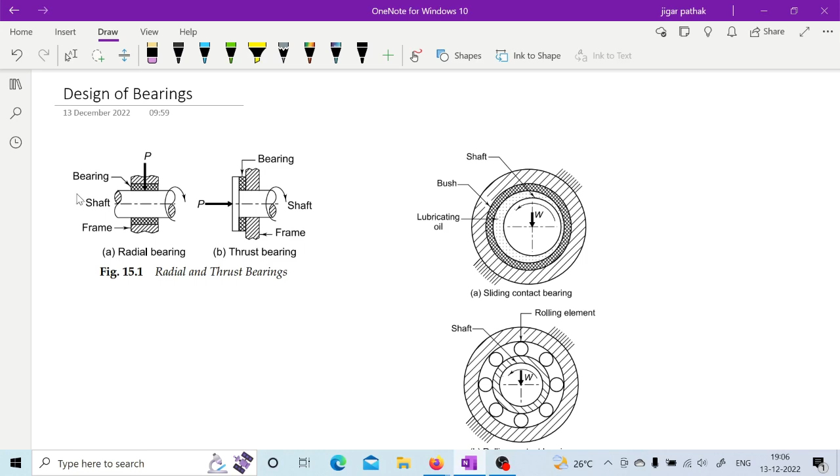If we discuss the main functions of bearing, then we can list those functions. First, the bearing ensures free rotation with minimum friction. Then it also supports and holds the shaft in correct position.

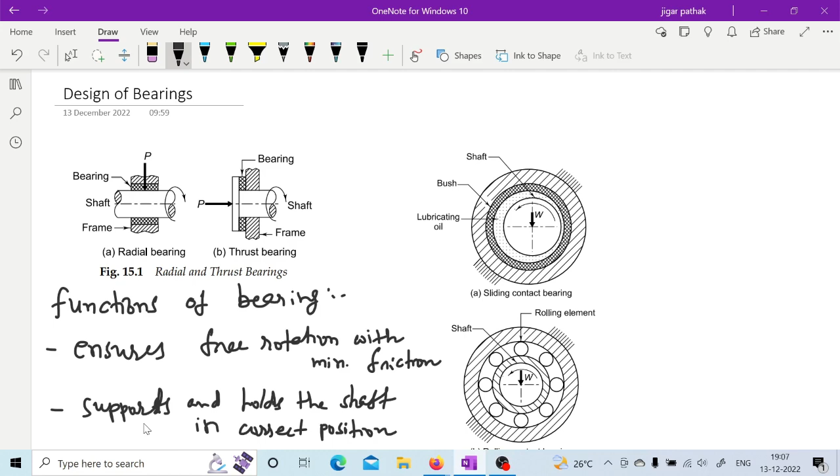It also takes up the forces acting on the shaft and transmits it to the frame. So the bearing takes up the load and transmits it to the frame. This is the main function of bearing.

Bearing may be classified based on various criteria. One criterion is based on the load it can take up. If the load acting on the bearing is in the radial direction, as mentioned in this figure, then it is considered a radial bearing. While if the load acting is along the axis of the shaft, as we can see in this figure, then it is considered a thrust bearing. So based on the direction of force, bearings are classified as radial bearing and thrust bearing.

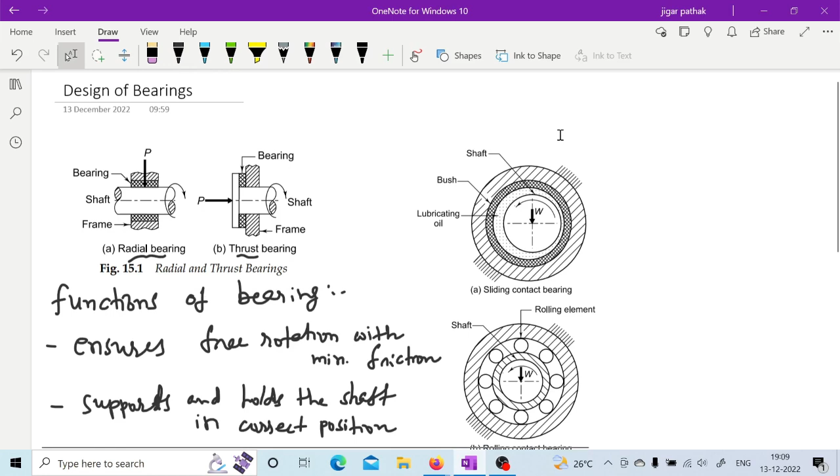Similarly, based on the type of contact, it is classified as rolling contact and sliding contact bearing, as mentioned in this figure. These are all rolling elements. In rolling contact bearing there will be a line contact, since the roller will have rolling motion and will perform the function of a bearing, allowing the motion of the shaft with minimum friction with respect to the housing.

Similarly, in sliding contact bearing there will be some sliding friction. Here there will be a bush, also known as journal bearing. This journal will have a film of lubricating oil between the housing and the journal, so it allows its motion without much friction between them. This is how the sliding contact bearing and rolling contact bearing are different.

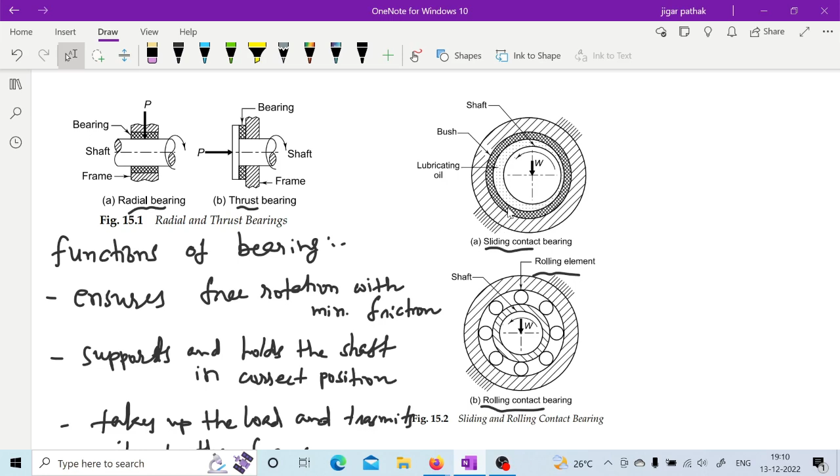We will now see the different types of bearing. If we start with rolling contact bearing, it is also known as anti-friction bearing, because in rolling contact bearing there is not much friction, while in sliding contact bearing some friction is present when we start the shaft. That is why it is known as anti-friction bearing.

If we go for the different types of rolling contact bearing, it is mentioned in this figure: deep groove ball rolling contact bearing, or cylindrical roller rolling contact bearing, based on the shape of the rolling element. Also angular contact bearing, self-aligning, spherical roller, taper roller, or thrust ball bearing. In this rolling contact bearing, mainly four components are there: the rolling element, outer race, inner race, and cage, housing all these elements. This is the construction and types of rolling contact bearing.

There is also a different capability of taking up load among these different types of bearing. In case of deep groove ball bearing or angular contact bearing, it can take radial load as well as thrust load both. While some particular types of bearings cannot hold radial load - for example, thrust ball bearing can only take up the thrust load. This way, based on the application, different types of bearing are employed in different machineries.

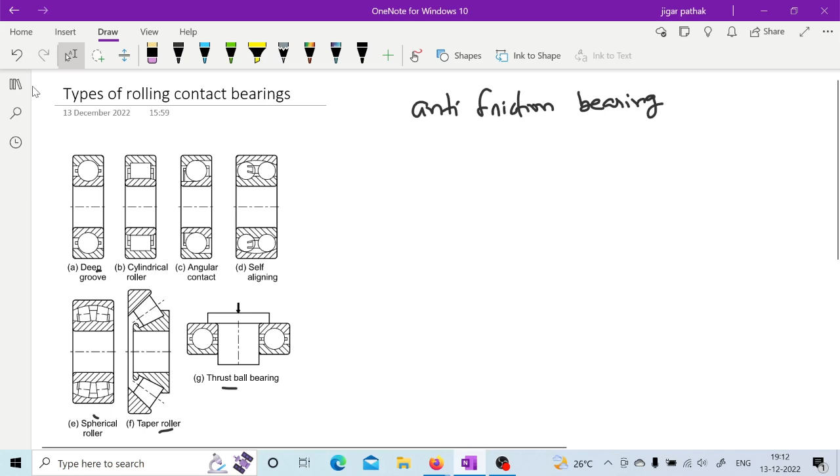So while this kind of application is there, when the shaft can be deflected through a particular angle, if this self-aligning bearing is not there, then there may be some wear of the bearing elements and all.

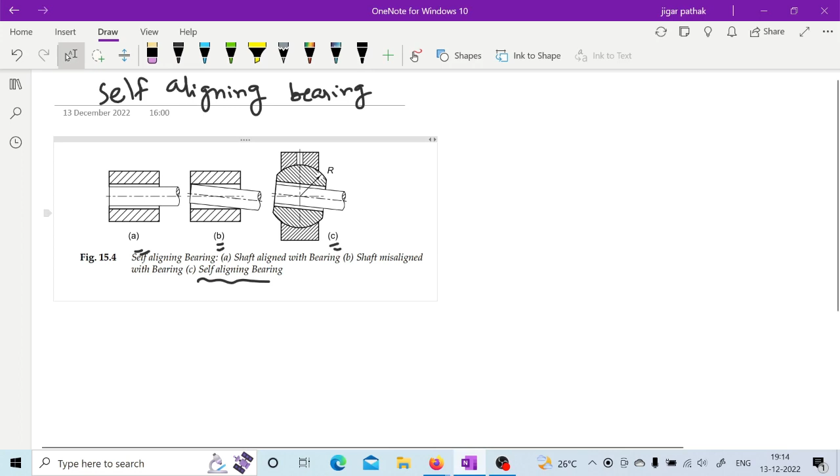So in this application, we are using this self-aligning bearing as shown in figure C. So as and when this shaft is going to deflect, this bearing element will also take its alignment along the shaft axis, as shown in figure C. So this is how self-aligning bearing is used for those applications where the shaft may have certain deflection.

Then there is static and dynamic load carrying capacity. Whenever we are designing these bearings, these two important things are there: static and dynamic load carrying capacity. Let us see first this static load carrying capacity.

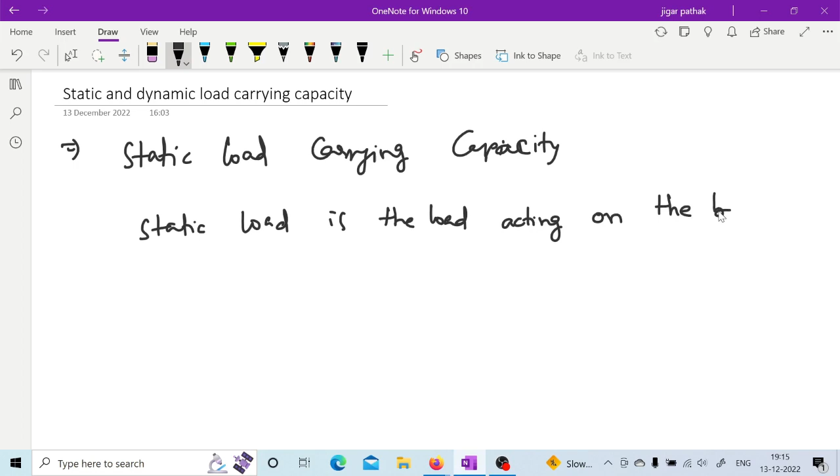So what do we mean by static load carrying capacity? Actually, static load carrying capacity means the static load is the load acting on the bearing when the shaft is stationary.

So actually, whenever we are talking about this static load, then because of this static load, there may be some deflection, or total permanent deformation of the ball and the cage or the inner race can happen.

So in case of this static load, for the maximum deflection allowed, or total permanent deformation allowed, it is generally of the order of only 0.0001 of the ball diameter, in case of ball bearing, for example. So the total permanent deformation allowed due to the static load is in the range of 0.0001 of the ball diameter.

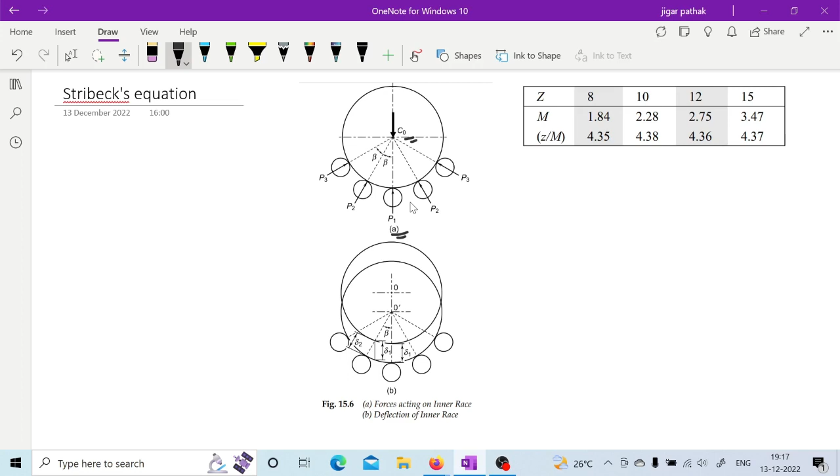So there are certain assumptions while deriving the Stribeck's equations. Let us first note down the assumptions for this Stribeck's equation: that the races are rigid and retain their circular shape - inner race and outer race.

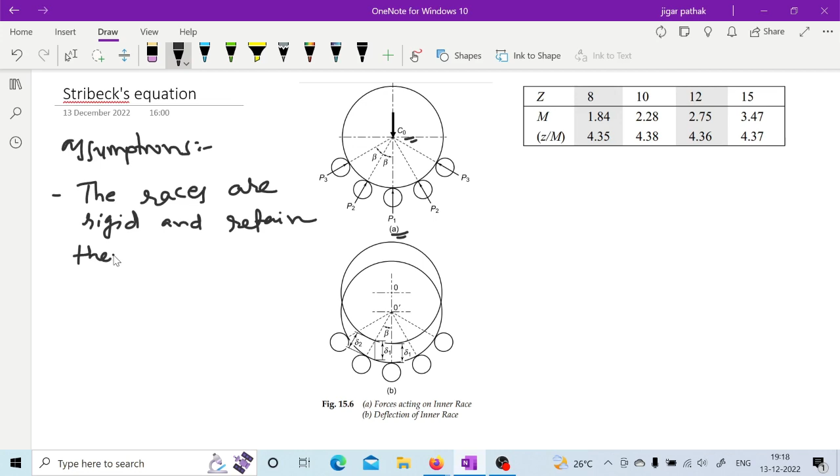The races are rigid and retain their shape or circular shape, and the balls are equally spaced.

And the balls in the upper half do not support any load. So only this lower half is considered. As we can see, the balls in the upper half do not support any load. So these are some of the assumptions while deriving this Stribeck's equation.

We will also see what this table suggests, we will discuss it. But before going to the table, first let us see what are the forces acting. So if you see, this C naught is the static load applied, and because of that, the reaction from all these balls is shown as P1, P2, P3.

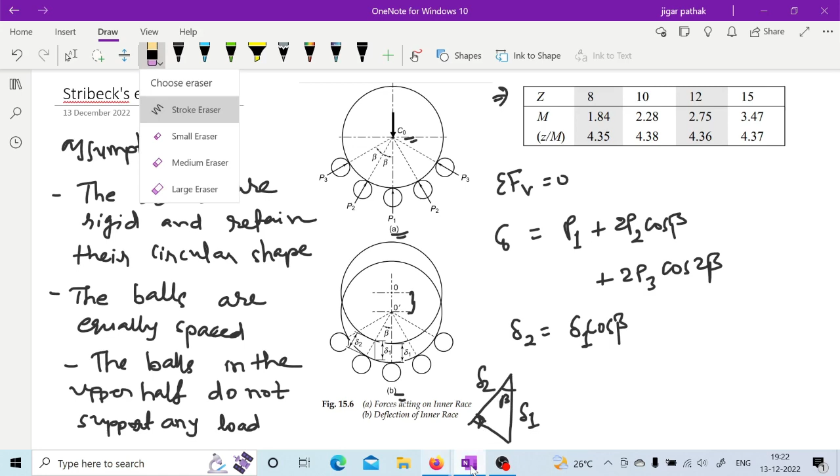This is delta 2, delta 1, this beta, and this is 90 degrees right here. That is why this projection is delta 1 cos beta, since this is the 90 degree angle. So delta 2 can be represented as delta 1 cos beta.

So that gives delta 2 by delta 1 as cos beta. Now these are all based on the Hertz equation, because contact stresses are present in this application. Based on the Hertz equation, delta is proportional to load P raised to 2 by 3. So for all the balls we can use this relation between deflection and load applied: delta 1 equals C1 P1 raised to 2 by 3, similarly delta 2 equals C1 P2 raised to 2 by 3, and so on.

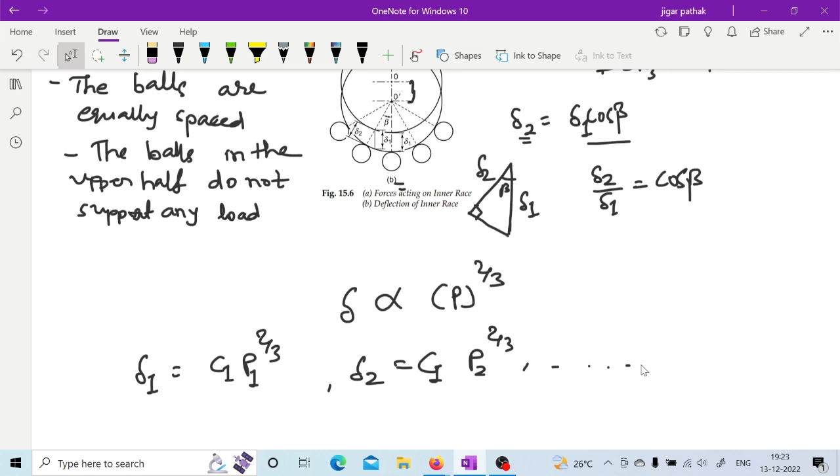So if you have this, then delta 2 by delta 1 can be written as P2 by P1 raised to 2 by 3. Sir, can you please repeat the step? Sorry? Can you please repeat the steps?

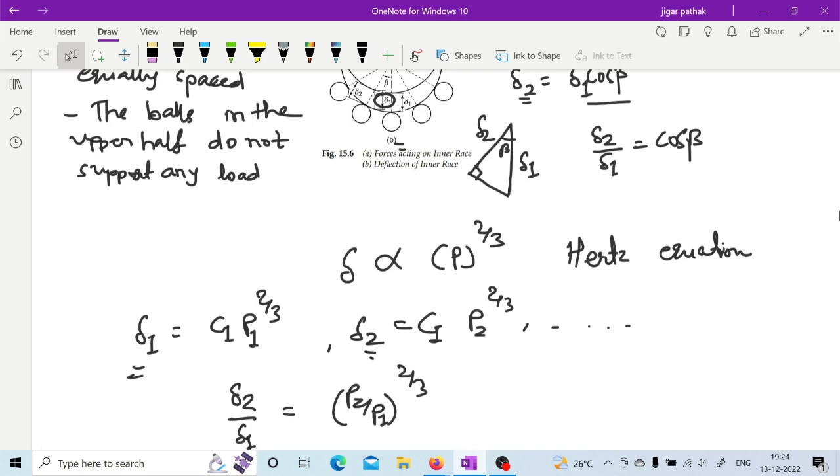So this deflection is proportional to the load, P1, P2, whatever is acting. The deflection is proportional to the load raised to 2 by 3 according to the Hertz equation. Using this relation, if we apply it to the deflection at different balls, we come up with the relation that delta 2 by delta 1 equals P2 by P1, raised to 2 by 3.

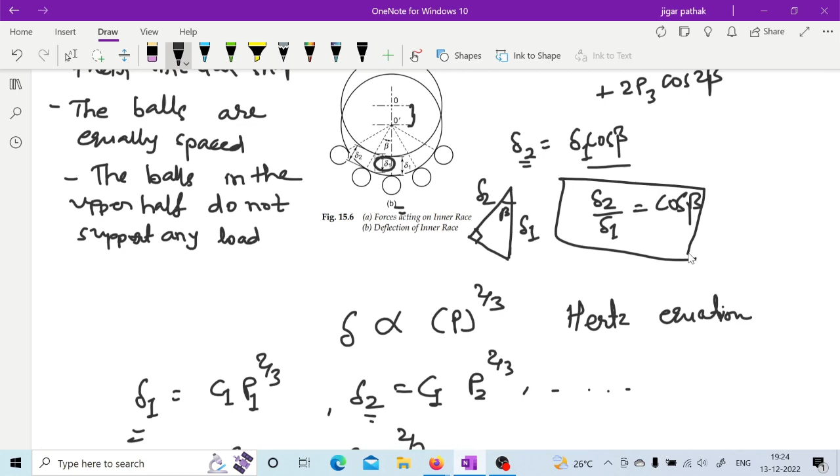As we have already derived, delta 2 by delta 1 is cos beta from the geometry. So if we apply that, cos beta will be equal to P2 by P1 raised to 2 by 3. So now we can write P2 equals P1 cos beta raised to 3 by 2. Is it clear?

Hello? Yes sir. Okay, similarly if you go for P3, in that case this angle is cos 2 beta. So you can derive in the same way that P3 equals P1 cos 2 beta raised to 3 by 2. Once you have the values of P2 and P3 in terms of P1, you can substitute them into this particular equation.

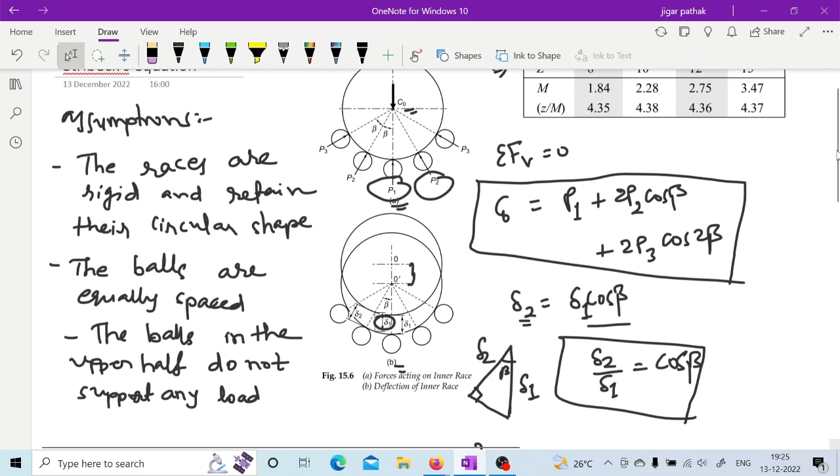So if you put the values of P2 and P3 into this equation, what we get is C0 equals P1 plus 2 P1 cos beta raised to 3 by 2, into cos beta, because it was 2 P2 cos beta, so we substituted the value of P2.

Similarly, the value of P3 is P1 cos 2 beta raised to 3 by 2, and cos 2 beta remains as it is. So we can simplify it as C0 equals P1 into M, where M is nothing but 1 plus 2 cos beta raised to 5 by 2, plus 2 cos 2 beta raised to 5 by 2, and so on.

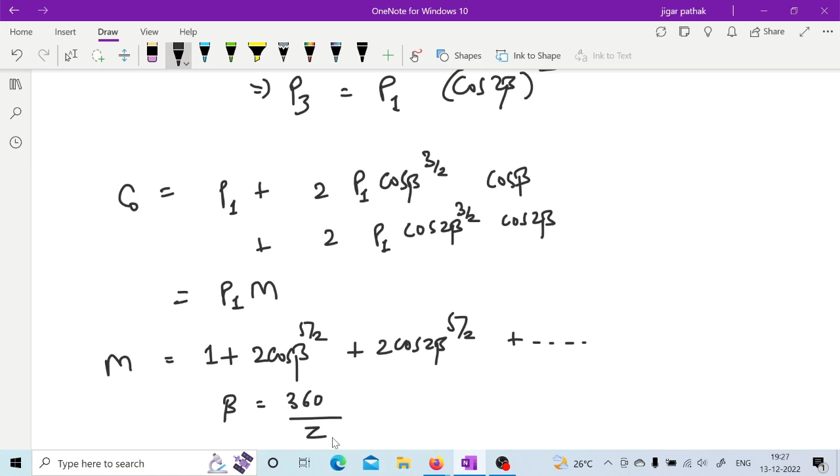Now this beta equals 360 by Z, because beta is the angle, as we have seen earlier, and Z is the number of balls. Since those balls are equally spaced, this beta is 360 by Z.

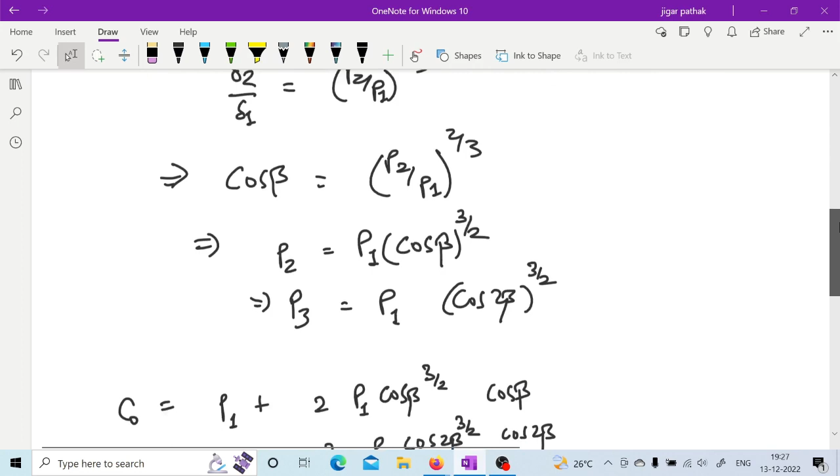Now that table comes into picture. If we use beta equals 360 by Z, and put the value of Z as 8, and calculate the value of M as derived here, then by putting Z, calculating beta, and then calculating M, it gives us the value mentioned here for M.

Similarly, for Z equal to 10, M is this, for 12 it is this, and for 15 it is this. So if we write the ratio of Z by M, it comes to about 4.35, 4.38, 4.36 and 4.37. So basically this Z by M can be considered as approximately equal to 5.

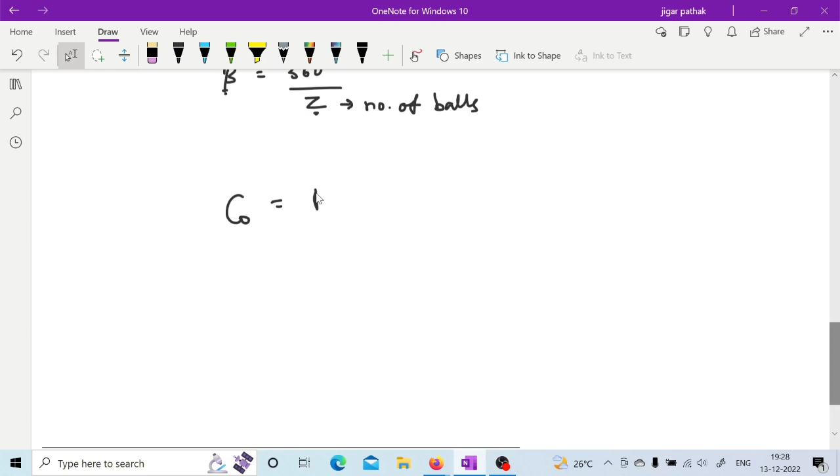So if we take Z by M approximately equal to 5, then C0 is equal to P1 M. If Z by M is approximately 5, then M is Z by 5. So C0 can be written as Z by 5 into P1, where P1 is represented as this KD square.

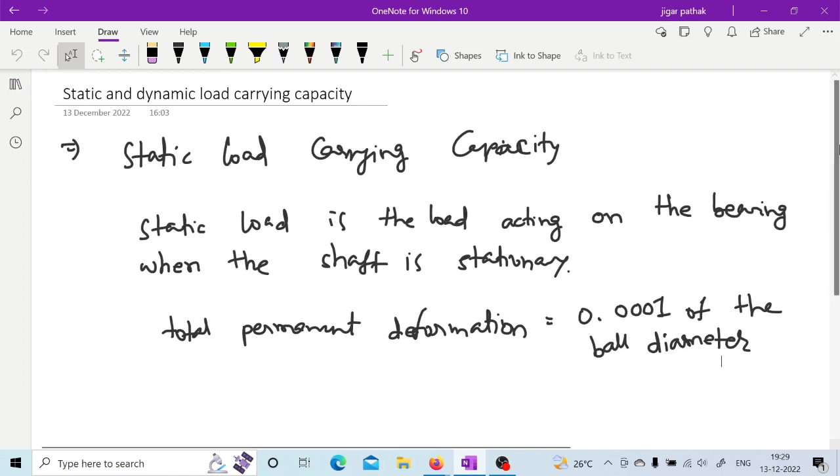So this is how you calculate the static load carrying capacity of a particular bearing. Now we also had written here that dynamic load, along with that static load. So now what is this dynamic load carrying capacity?

Basically, whenever any radial load bearing is there, the capacity of the bearing is defined as the radial load in the radial bearing that can be carried for a minimum life of 1 million revolutions. So this should be considered as the dynamic load rating.

So basically whenever the bearing is in operation, then actually this load rating or that actual bearing life, L10 life, is considered. It is basically 90% of the ball bearings - the life where 90% of balls are able to complete that number of revolutions without the first evidence of any crack in it. So this is how we have this dynamic load carrying capacity.

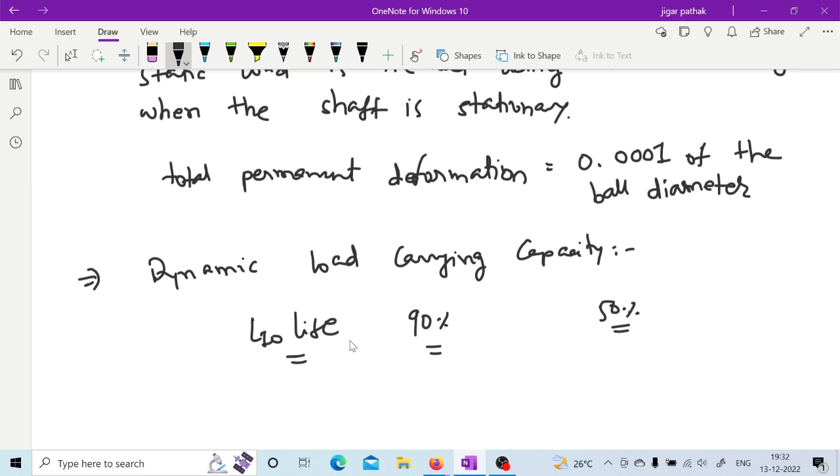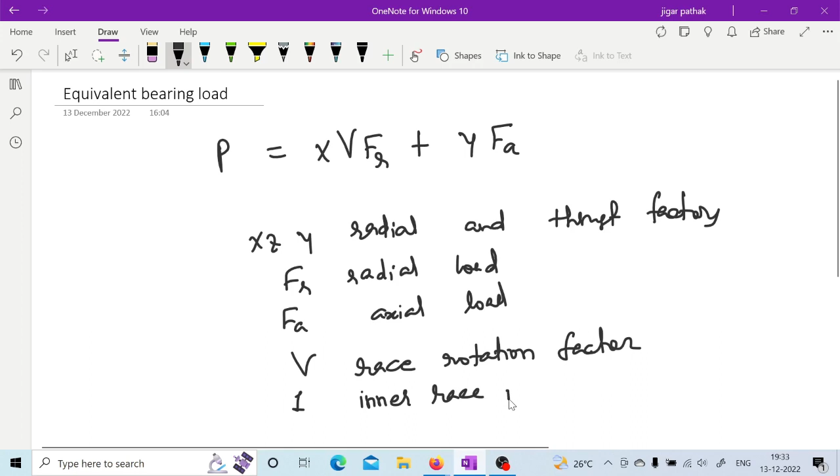So it is generally considered as 1 when the inner race is rotating and the outer race is stationary, and 1.2 when the outer race is rotating and the inner race is stationary. So generally it is considered as 1 only, this V, the race rotation factor.

1.2 race rotation factor when we consider, sir, what are the applications? Most of the times we take V equal to 1. Yes, most of the time this inner race is rotating. So in some applications it is required that the outer race must rotate, so in those cases this 1.2 is considered. Otherwise this V is taken as 1 only.

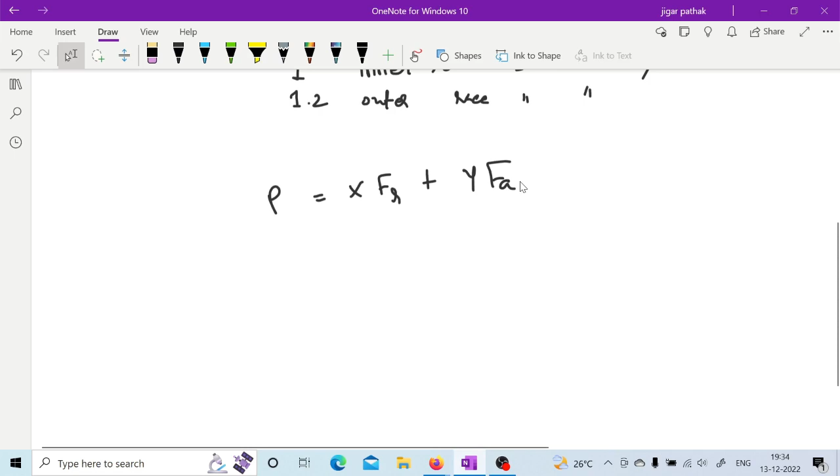Okay, so if we take V as 1, then our equation is simplified as xFr plus yFa. So sometimes only radial load is acting, in that case P will be equal to xFr, and if only axial load is there, then P will be equal to yFa - like that we need to consider.

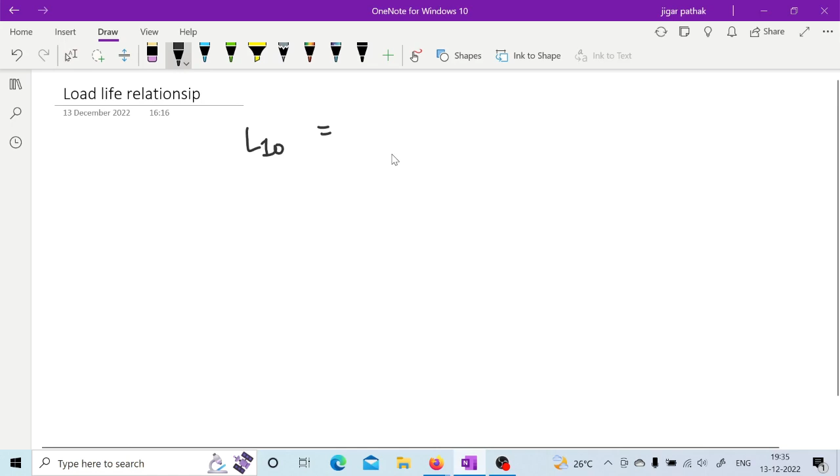So once we have an idea about this, there is one more important thing: the load life relationship. If we consider this L10 life, it is represented as C by P raised to n, where n is equal to 3 for ball bearings, and 10 by 3 for roller bearings. Now the C is nothing but the dynamic load capacity.

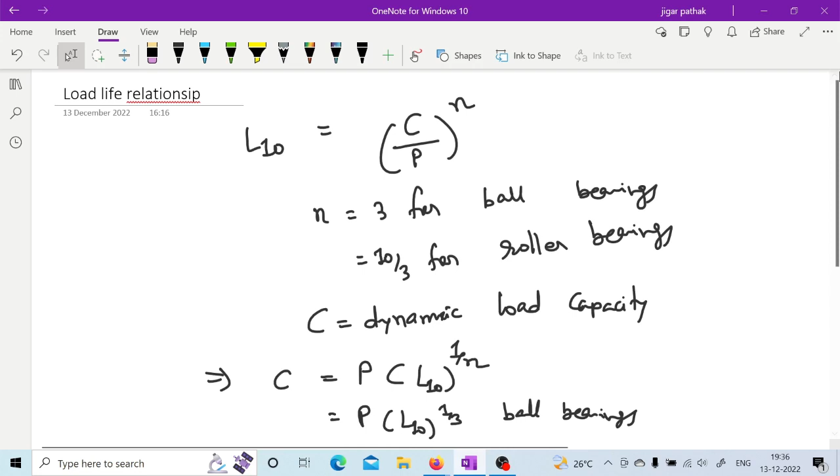Right, so if you rearrange that equation, you can write that dynamic load capacity can be represented as load into L10 life raised to 1 upon n. So for ball bearings it will be P into L10 raised to 1 by 3. While for roller bearings it will be P into L10 raised to 0.3. So this is how you can have the relation between dynamic load capacity and the load acting on the bearing.

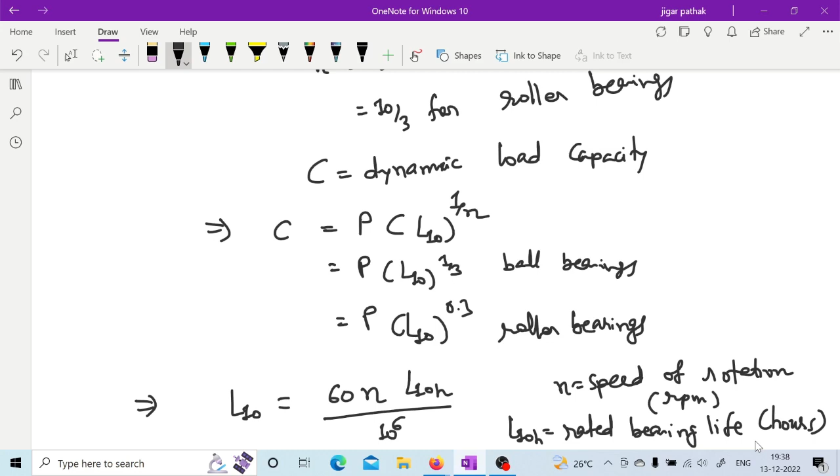Now in case of mentioning rated bearing life in hours, there is one more relation: L10 equals 60n into L10H divided by 10 raised to 6. Here L10H is the rated bearing life in hours, and we divide by 10 raised to 6 because L10 is given in million revolutions. So this L10 into 10 raised to 6 equals 60 into n, where n is the speed of rotation in RPM, and L10H is the rated bearing life in hours. This is how you get L10 life in million revolutions, so from rated bearing life in hours you can convert it into million of revolutions.

So if we have this much understanding about bearings, let's go for solving a simple numerical, one by one. First: in a particular application, the radial load acting on a ball bearing is 5 kilonewton, and the expected life for 90% of the bearings is 8000 hours. Calculate the dynamic load carrying capacity of the bearing when the shaft rotates at 1450 rpm. So can you try this one?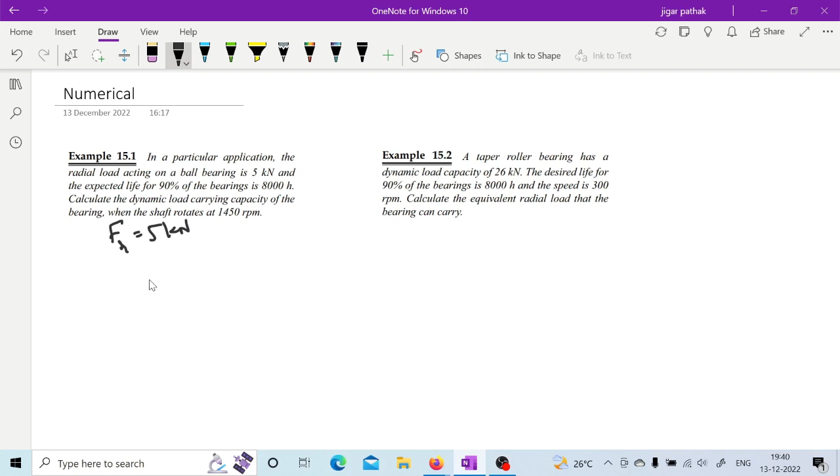Yes sir, so here what is given is Fr is 5 kilonewton, L10H is given as 8000 hours, and N is 1450 rpm.

Okay, so now from this you can calculate the L10 life in million revolutions, as we have seen, L10 is nothing but 60n L10H upon 10 raised to 6. So it is almost coming around 696 million revolutions.

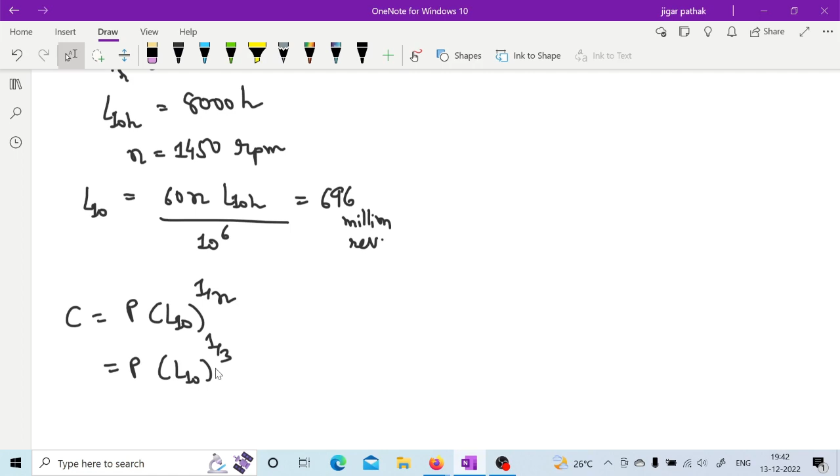And then the dynamic load capacity, that is C. So what is the relation between C and L10? C is P into L10 raised to 1 by n. Here it is ball bearings, so it will be P into L10 raised to 1 by 3, yes or no? So what is C? 44.31 kilonewton. Okay, so once you have calculated this, then you can see the next one.

Second one: a taper roller bearing has a dynamic load capacity of 26 kilonewton. The desired life for 90% of bearing is 8000 hours and the speed is 300 rpm. Calculate the equivalent radial load that the bearing can carry. So now how can you approach this particular problem?

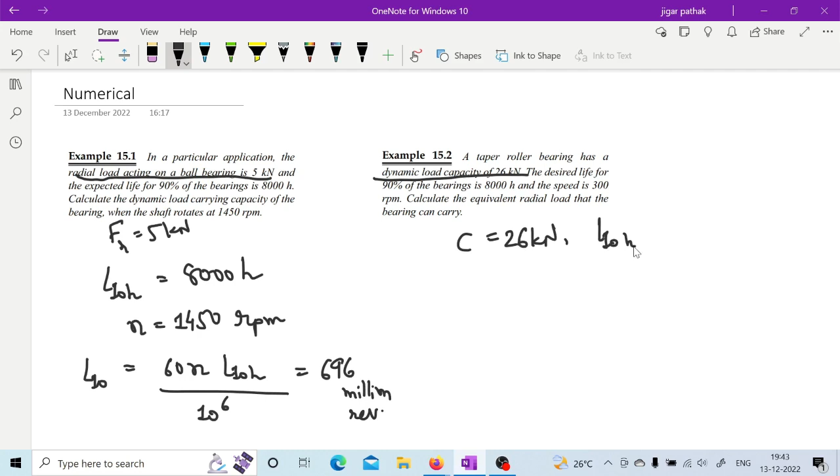Here the dynamic load capacity is given, right, unlike before where the radial load acting was given. So C is equal to 26 kilonewton, L10H is again 8000 hours, and N is 300 rpm.

So from this, first you can calculate million revolutions as previously. What is this? Sixty into 300 into 8000 by 10 raised to 6. So it is around 144 million revolutions.

Then what you are asked in this case is to calculate P, the radial load. So how can you calculate that? You know C is equal to P into L10 raised to 1 by n. Here n is 10 by 3 because it is roller bearing, correct? So 26 into 10 raised to 3 equals P into 144 raised to 0.3. This will give you P. So what is P?

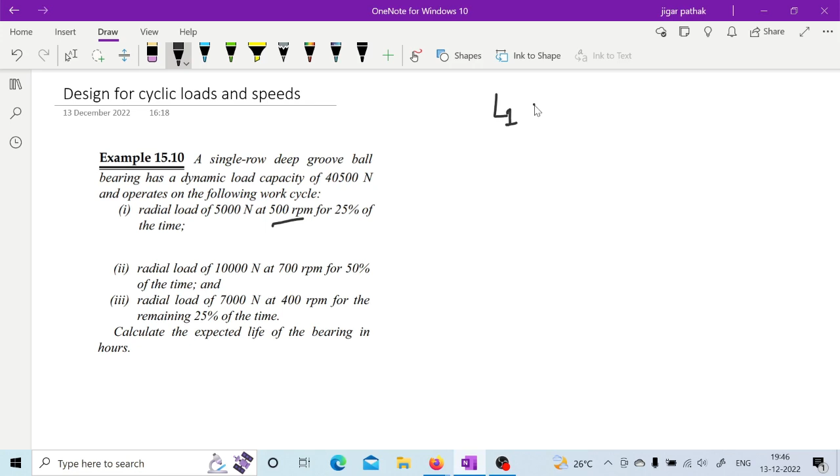Suppose for P1 we are assuming that life is L1. So for L1 we can write, if we consider a ball bearing, C by P1 whole cube into 10 power 6 revolutions. So this life would be L1 if only P1 is acting on the bearing.

Similarly, in one revolution, the life consumed is considered as 1 upon L1. So if we consider that life consumed is 1 upon L1, it is actually given by P1 cube upon C cube into 1 upon 10 power 6.

Now if the first element consists of n1 revolutions, then the life consumed by the first element is given by n1 P1 cube upon 10 power 6 into C cube. The same way you can go on adding the life for the other RPMs.

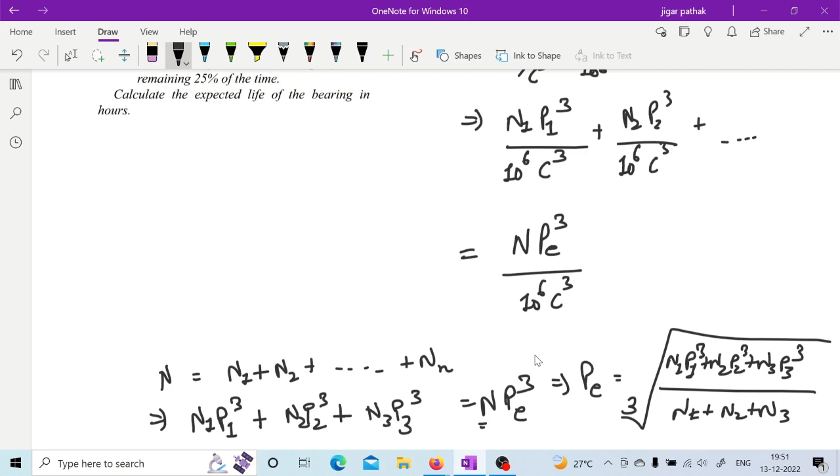From this we will be able to calculate the equivalent load PE, given by N1 P1 cube plus N2 P2 cube plus N3 P3 cube, divided by N1 plus N2 plus N3, because N is nothing but the sum of all this RPM. Once you have this relation, you will be able to calculate the equivalent load PE.

This is used when we are not having any variation. Otherwise, if the load is varying with respect to time, then we need to integrate it, like integral from 0 to n of P cube dn, divided by integral from 0 to n of dn, and the whole thing raised to the power 1/3. This is how you can come up with the equivalent load.

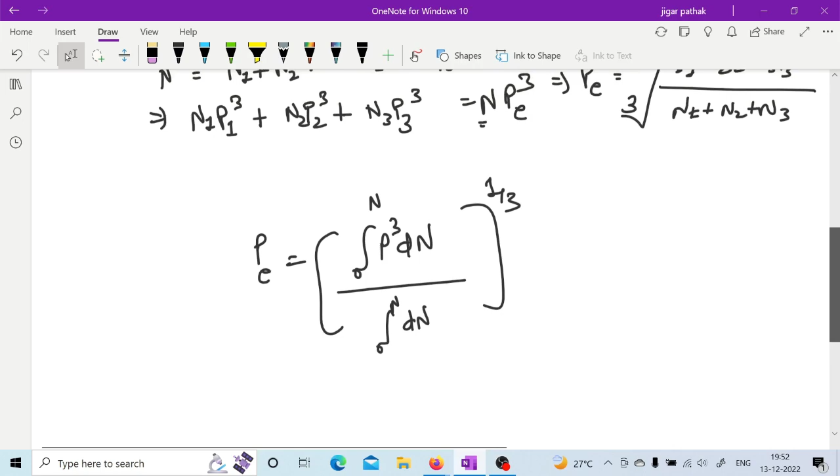Now having this idea about cyclic and fatigue loading, you can try and attempt this question. A single row deep groove ball bearing has a dynamic load capacity of 40,500 Newton and operates on the following work cycle: radial load of 5000 Newton at 500 RPM for 25% of time, radial load of 10,000 Newton at 700 RPM for 50% of the time, and radial load of 7,000 Newton at 400 RPM for the remaining 25% of time. You need to calculate the expected life of the bearing in hours. So how can we approach this?

So in that case we need to calculate that equivalent load. Because you are given that 40,500 is the dynamic load capacity, that is C, and you are provided with the different RPMs for different loads. So from that you need to come up with equivalent load, so that you will be able to calculate first that millions of revolutions, that is equivalent life. And once you calculate that equivalent life, then you will be able to calculate it in hours by that relation, L10 is equal to 60n L10H divided by 10 raised to 6.

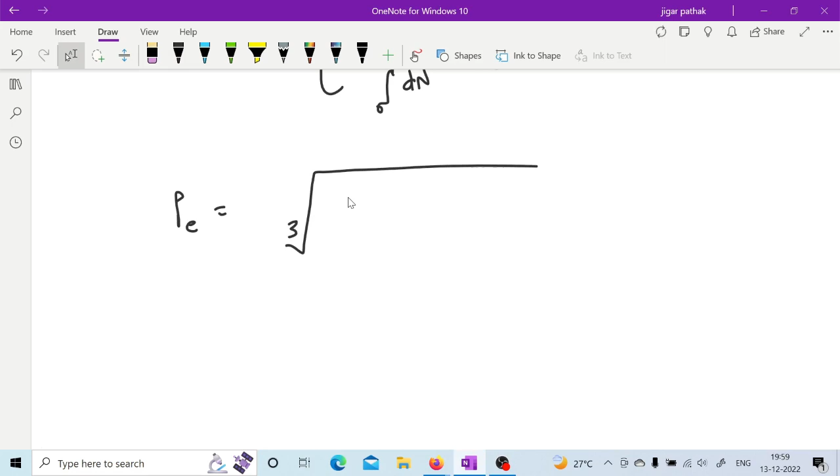Yes sir. Okay, so once you have this data, then you can now calculate this PE with this equation which we have just derived. This PE equals N1 P1 cube plus N2 P2 cube plus N3 P3 cube divided by N. We have calculated the total N as 575. So you can tell me what is this PE.

Can anyone tell? What is this PE? 8860, sir. Yeah, it is almost around 8860 Newtons. So once you have this PE, then you can calculate the life in millions of revolutions with this relation.

Let's see, by PE to the power of 3, because it is a ball bearing. So what is that C you have already, that is 40,500. 40,500 divided by 8860.6, to the power of 3. So what is the answer? 96. It is almost around 96 million revolutions.

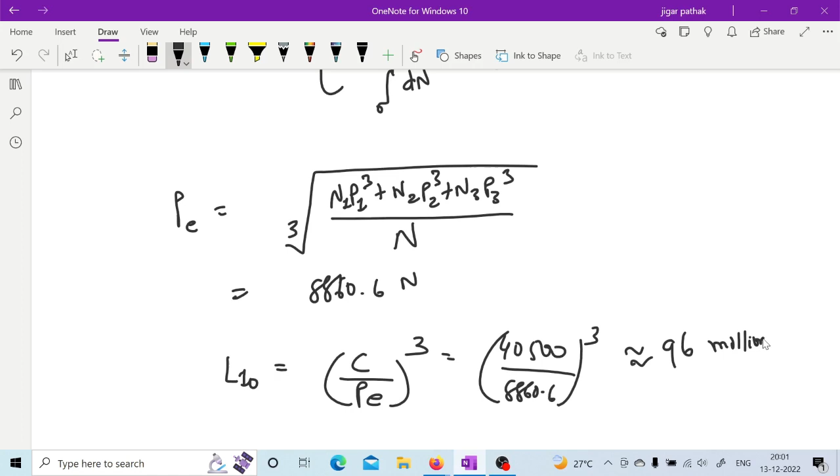So once you have this, you can calculate that L10 hours. How you will be able to calculate that? L10 hour is n into 60 into L10h divided by...

So yeah, in calculating PE, N1 is 125, and P1 is 5000. So from this now we will be able to calculate. Sir, actually each part of the term represents how much amount of revolution it is actually contributing. That n1 is actually the amount of revolution that has occurred while that p1 load is acting. That is what it is.

So what is the speed in the rated life? In the relation formula, what is the speed, sir? N is given, I guess. That 575 we have calculated. Total revolution we have calculated as 575, and we have assumed life of 1 minute, so 575 is your n here.

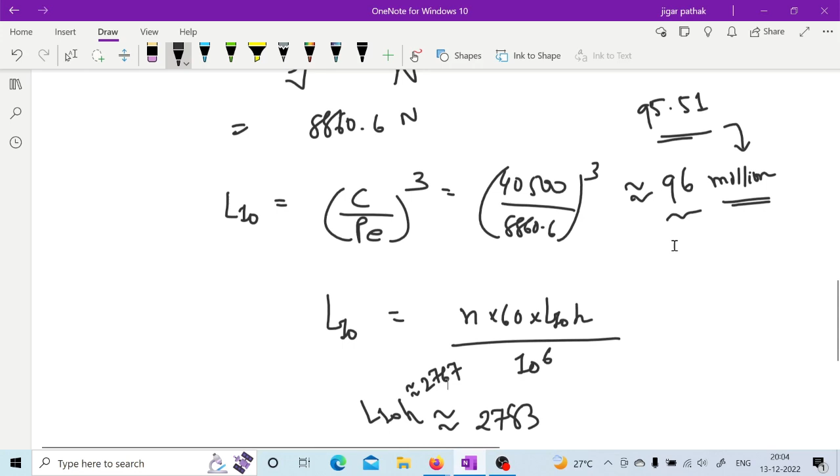Once you are done with this, we can go to the next one, that is the sliding contact bearing. In sliding contact bearing, we are having hydrodynamic lubrication or hydrostatic lubrication. Generally we have this kind of lubrication in case of sliding contact bearing.

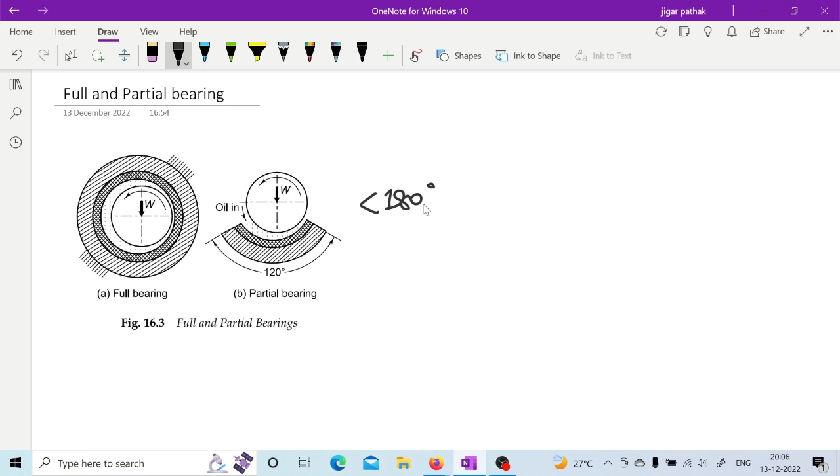Once you have idea about this hydrodynamic bearing, it can be a full bearing or partial bearing. As you can see here, this is full bearing, where the full journal is inside, while here only the partial journal is there, so a partial surface or bushing is provided to the journal. In this case it is always less than 180 degrees for partial, and most of the time it is around 120 degrees as mentioned in this figure. So this is how full and partial bearing is distinguished in case of hydrodynamic bearing.

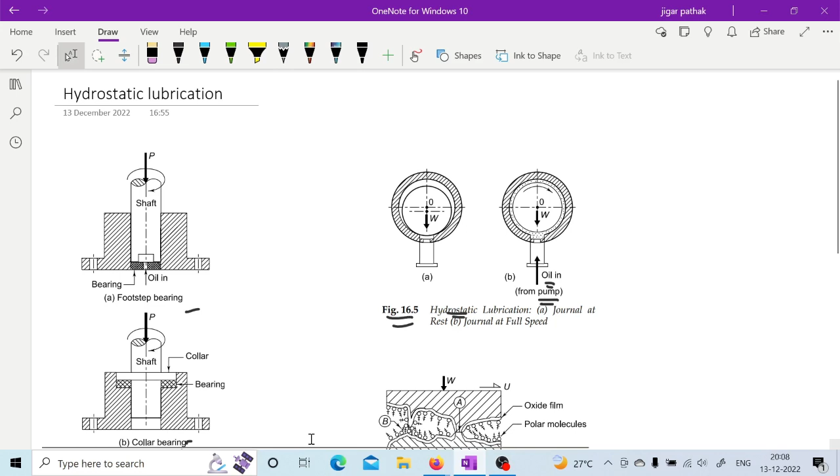This is something related to footstep bearing and collar bearing. I guess this is some thrust bearing, where along the axis of the shaft the force is applied. So this is the types of thrust bearing as mentioned here.

Now in case of boundary lubrication, this film is very thin. So what happens is at some place you may have metal to metal contact, as mentioned here at place A, while at other places there is a cluster of molecules as mentioned at B. In this case a particular type of lubricant is used, having polar molecules. Polar molecules means in certain lubricants the positive and negative ions are separated. So this is how we can achieve polar molecules in certain lubricants, and those lubricants are used in this kind of boundary lubrication.

So this is how you can have that boundary lubrication. But in that case, as you can see, somewhere this metal to metal contact will be there, right?

So now, in case of understanding this sliding contact bearing, as a lubricant film is generated between that journal and the bearing surface, it is important to understand this concept of viscosity. I guess you have come across this in your fluid mechanics, right? But let's try to understand this again.

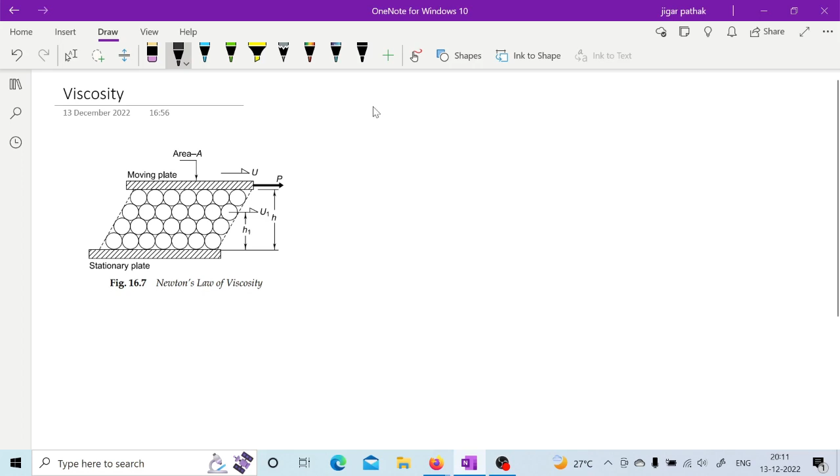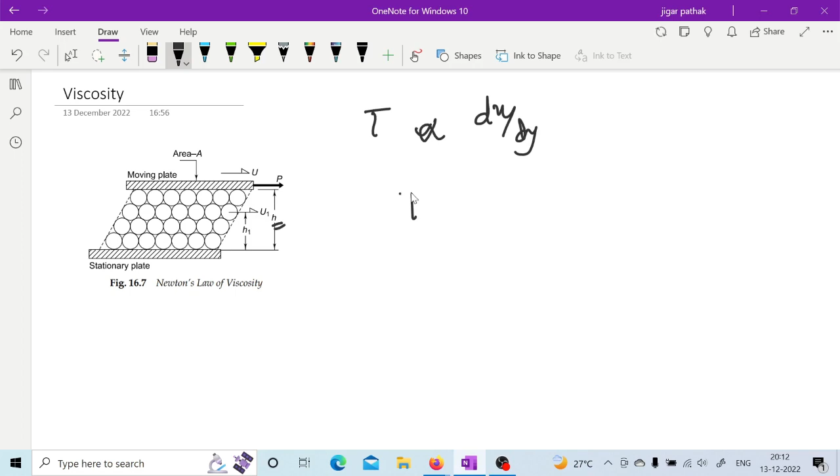So basically we can represent this shear stress, as per Newton's law of viscosity, as tau proportional to velocity. Mu is that proportionality constant, so tau is proportional to du by dy. Du is the change in velocity, and y is actually this h. You can also consider it du by dh instead. From this figure, you can consider that this tau, or the shear stress, is proportional to du by dh, the change in velocity with respect to the distance from the stationary plate.

So now if you further write this stress in terms of the load applied and the area, you can write stress as P by A is equal to du by dh, and here your proportionality constant is the viscosity. So P by A is equal to mu du by dh. This is how you can have the relation between that load and this velocity.

So you can define viscosity as mu is equal to P by A into dh by du. If you write it for a particular point, you can consider it as P by A into h by u. If you are considering any point at distance h, this may be the full distance h, then the velocity may be the actual velocity of the plate with which it is moving. So at that particular point, mu can be represented as P by A into h by u, and the unit is Newton second per mm square.

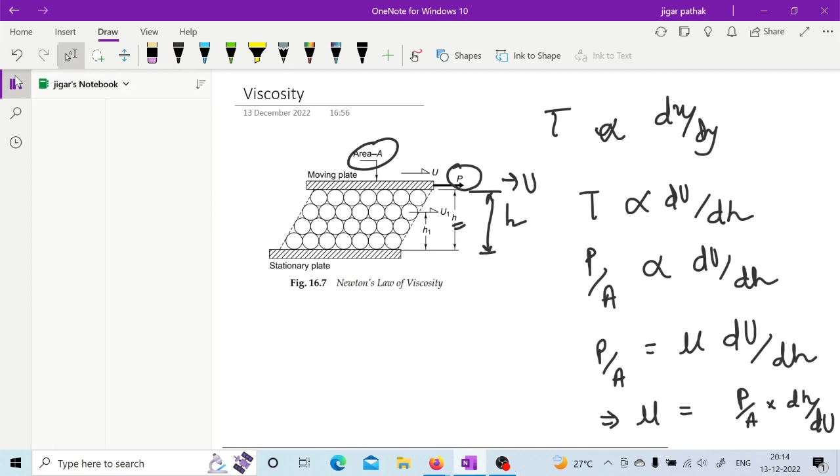So basically megapascal into second. So this is how this viscosity is there for this particular fluid.

Now if we go for this Petroff's equation, then again there are some assumptions, that the shaft is concentric with bearing and the bearing is subjected to light load, something like that.

So if we are going to derive this particular Petroff's equation, we can first note down some things: r is the radius of the journal, L is length of bearing, C is radial clearance, and ns is journal speed, which is in revolution per second.

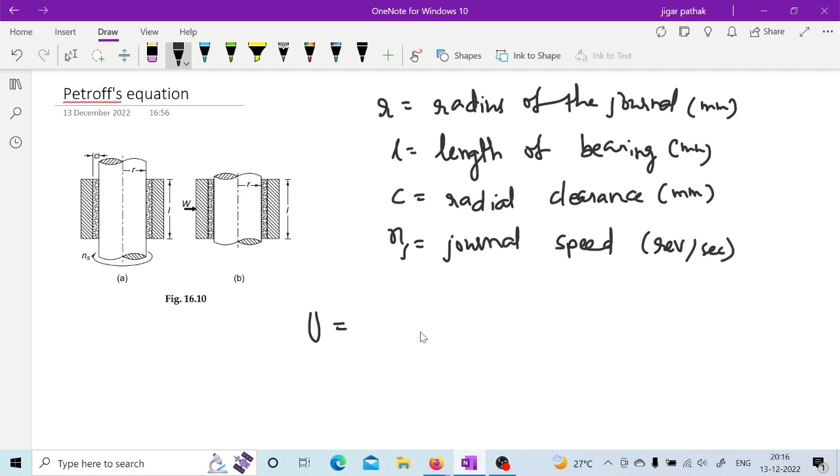Now the velocity at the surface of the journal is given by 2 pi r into ns, that is pi dn basically. So this is given as 2 pi r into ns.

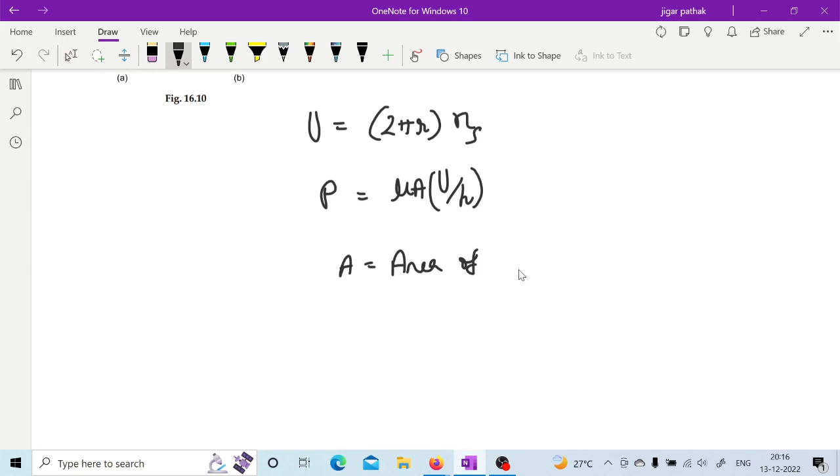Now Newton's law of viscosity we have already mentioned as P is equal to mu a u by h. Now P is tangential force as we know, and the area of journal surface here, if we write, P is tangential force, but the area of journal surface is pi dl, that is 2 pi r into l, that is surface area. Then surface velocity, as we already mentioned, is 2 pi r ns. And then h is nothing but the distance between journal and bearing surface, that is clearance, so h is nothing but c.

So now if you put all these values into this equation, P is equal to mu a into u by h. So P is equal to mu a, which is 2 pi r l, that is pi dl.

Then u, as we have mentioned, that pi dn, that is 2 pi r ns, and h as we have considered as c. So if you give simplification, then it is 4 pi square r square l mu ns by c. That is 4 pi square r square l, into mu, into ns, divided by c.

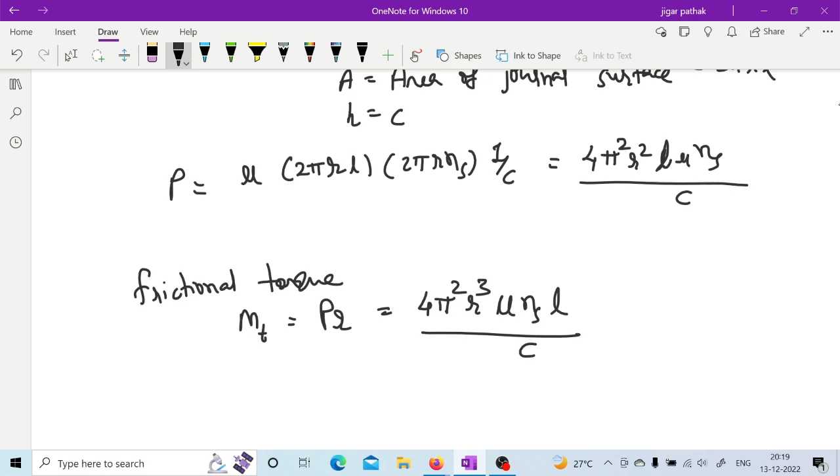Now if you consider radial load acting on the bearing, as mentioned in the figure, we are talking about this particular radial load W. Then pressure because of that radial load can be given as P equal to this radial load upon projected area of bearing. Projected area of bearing is simply 2r into length of the bearing, that is diameter into length of bearing.

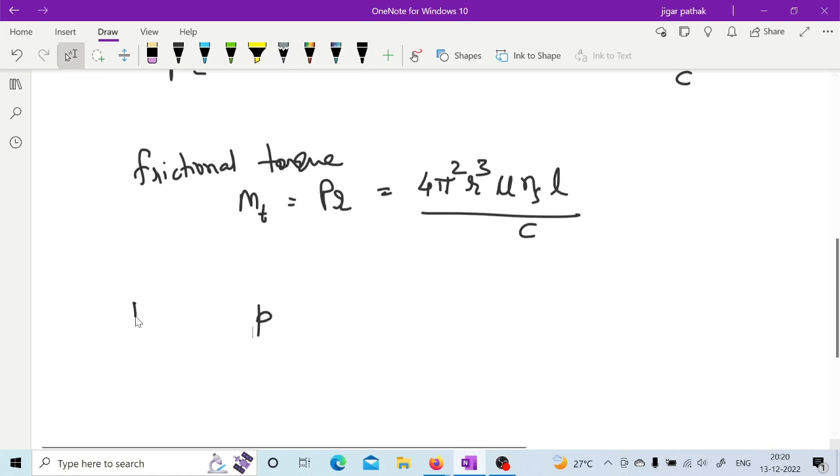So because of this particular W, what we are having is bearing pressure. This unit bearing pressure we can define with this radial load W. This bearing pressure P is equal to W upon projected area. So this P is equal to W upon 2RL, and 2RL is nothing but the diameter into length. So from this you can write W is equal to P into 2RL.

So once you know this, then the frictional force will be F into W, and frictional torque will be F into W into R. So as you have W as radial load, then FW as frictional force, and because of that you will have frictional torque, that is FW into R. So F into R as it is, and W we have written as P into 2RL. So P into 2RL, if we further simplify, then it is P into 2R square L.

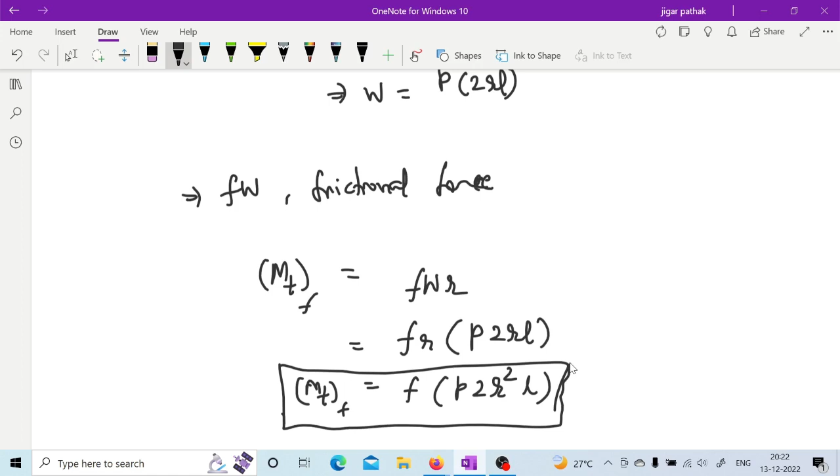Like this. So once you have this frictional torque, then we have also calculated frictional torque earlier, so you have this frictional torque like this, and you have also derived frictional torque earlier like this. So once you have both of this frictional torque, we can equate this.

So if we equate this, then we can have that value of this F, that is nothing but coefficient of friction. So once you equate this, it is F into P 2R square L will be equated to 4 pi square R cube L mu ns upon C. So now from this you can write this F is equal to 2 pi square R by C, mu ns by P.

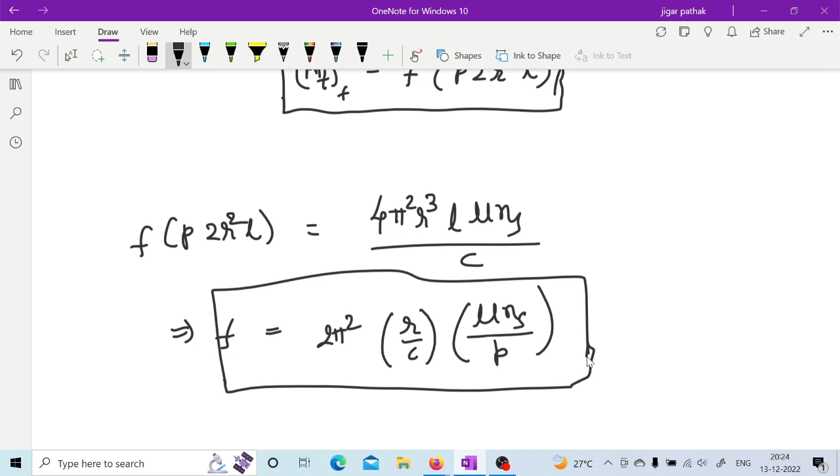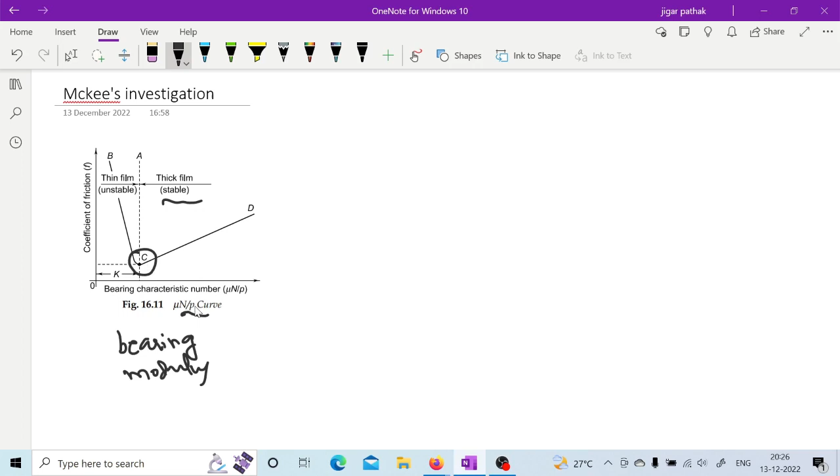Bearing modulus - the minimum value of this bearing characteristic number should be equal to K in order to avoid metal to metal contact. So generally it is kept at 3K so that it is ensured that there is no metal to metal contact while operation is going on. So generally this bearing modulus is kept that high, almost 3K, in order to avoid this metal to metal contact.

But in the BC region there is a thin film, so there may be some metal to metal contact, but in the CD region it can be avoided. So this is how you can have this sliding contact bearing and the importance of this thick film and thin film lubrication, and the difference between hydrodynamic bearing and hydrostatic bearing.

So once you have an idea about this, then we can see some of the questions from GATE. If you see this question: which one of the following is a criterion in the design of hydrodynamic journal bearing? So basically what we have discussed is known as the Sommerfeld number. That particular Petroff's equation number we have seen is known as the Sommerfeld number, so here your answer will be this Sommerfeld number.

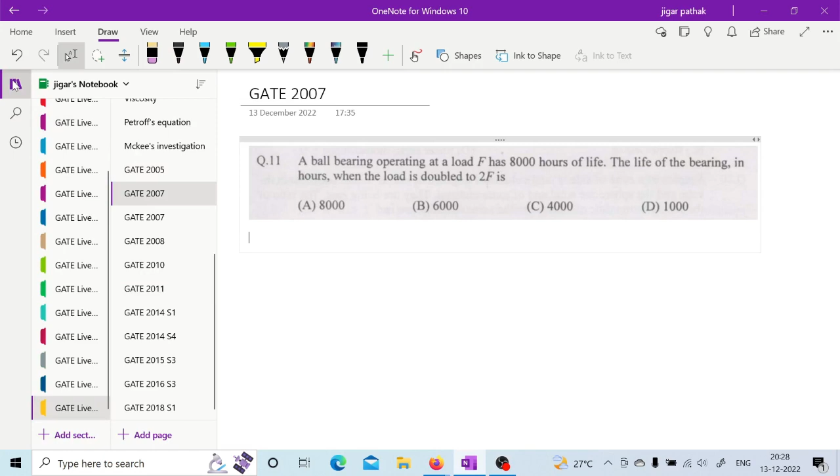This is the question from GATE 2007. It says that a ball bearing operating at a load F has 8,000 hours of life. Now, what is the life of bearing in hours when the load is doubled to 2F? Can you try this question?

1000 hours. 1000, sir. 1000. Anyone else?

See, this L10 we have considered - what is that L10? Anyone can tell, in revolutions? Yeah, it is C by P raised to n, into 10 raised to 6 number of revolutions. And in case of the ball bearing, this n is 3. This 10 raised to 6 I have not mentioned because we were writing that revolution as million revolution.

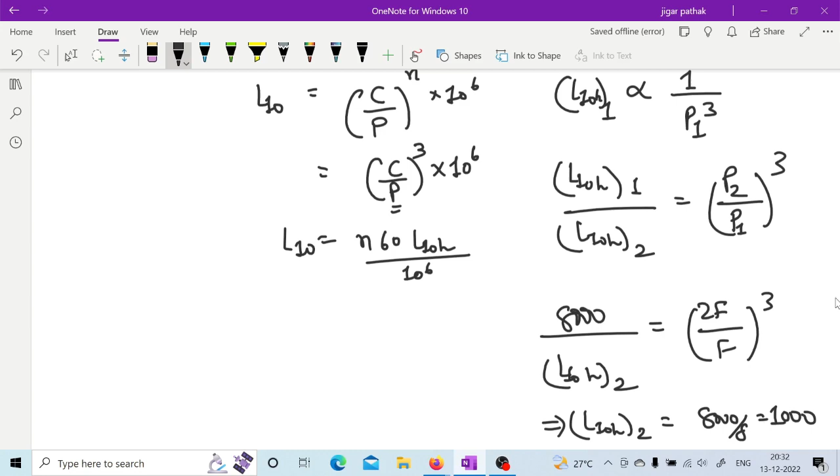It is 8000. What you need to calculate is L10H2, equal to P2 is 2F, P1 is F, cubed. So L10H2 is equal to 8000 by 8. Yes or no? Yes sir, so this way L10H2 is equal to 1000. So this is how you will get this.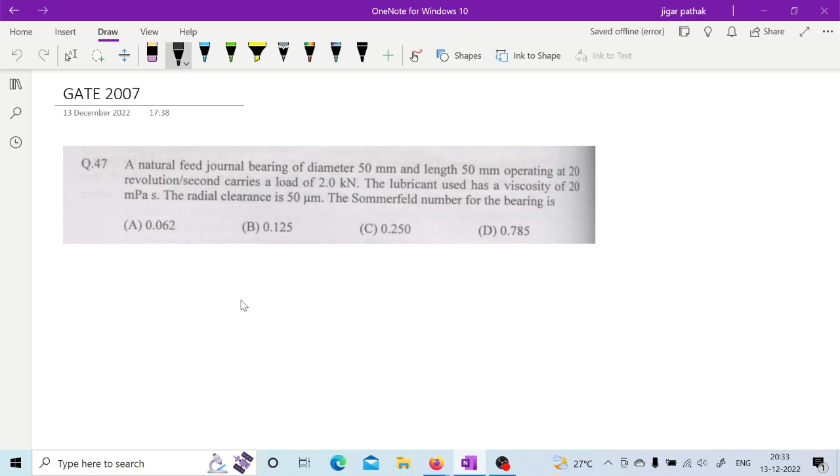So then the next question is: a natural feed journal bearing of diameter 50 mm and length 50 mm, operating at 20 revolutions per second, carries a load of 2 kilonewton. The lubricant used has a viscosity of 20 millipascal second. The radial clearance is 50 micron. The Sommerfeld number for the bearing is - so what is the Sommerfeld number? Actually this Sommerfeld number is R by C square into mu n by P.

So this P is bearing pressure on projected area, it is bearing pressure, right, on projected area. Then n is the number of revolutions per second. Then mu, you know, is viscosity. And C is clearance, radial clearance. R is the radius of the journal.

Right, so this actually has come from Petroff's equation only. If we go and check this, it has come from this only, right? This Sommerfeld relation, R by C square, here it is 2 pi square R by C mu n s by P, right? So from this only, this Sommerfeld number has come.

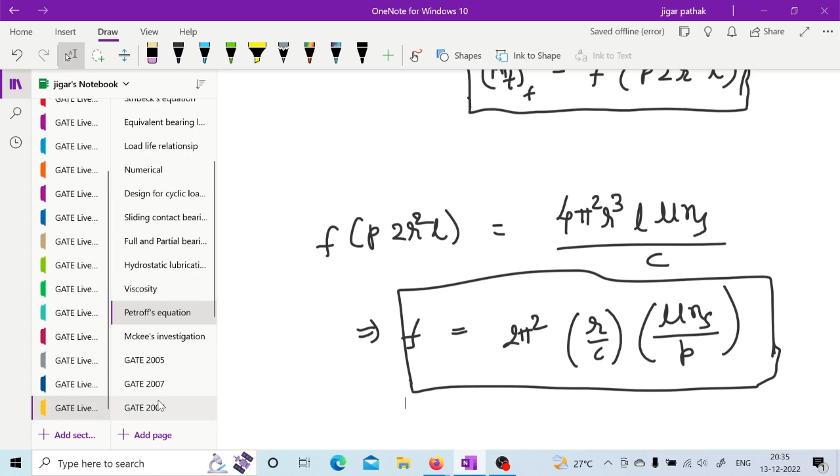So I guess you can try with this one, right? This bearing pressure is, as we have calculated, W by DL. 2 pi RL we have written. So this bearing pressure is W by dl. W is given, 0.125? Answer, sir, 0.125? Yes, correct. So this bearing pressure is W by d into L, where W is given as 2 kilonewton, right? 2000 divided by this diameter and length, both are 50.

And what else? Radius is 25 and clearance is given as 50 micron, right? So if you put all the values, simplify this 2000 by 50 into 50, then it will be 20 by 25, right? 20 by 25 is 4 by 5, so 0.8. So now S is equal to 25 by radial clearance is 50 microns.

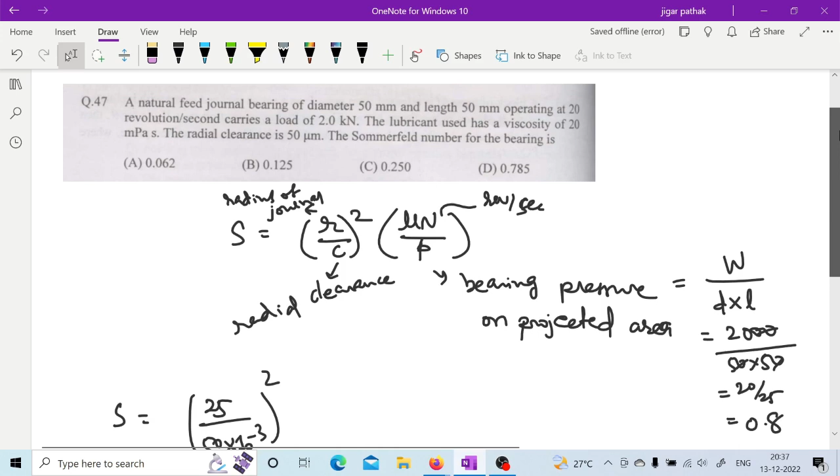So if we convert it into mm, then 50 into 10 raised to minus 3. So this whole square, into mu n by p, right? Mu is given as, let us see, mu is given as 20 millipascal second, right? Mu is 20, n is 20 revolution per second, and p we have calculated as 0.8. So it is 20 into 10 raised to minus 3, divided by 0.8.

So 0.8 into 10 raised to 6, because we are considering it in Pascal and it is megapascal, 0.8 megapascal, right? 0.8 Newton per millimetre square is 0.8 megapascal. So as we are considering it in Pascal, it will be 0.8 into 10 raised to 6. So this is how, once you simplify this, you will get 0.125. So is it clear?

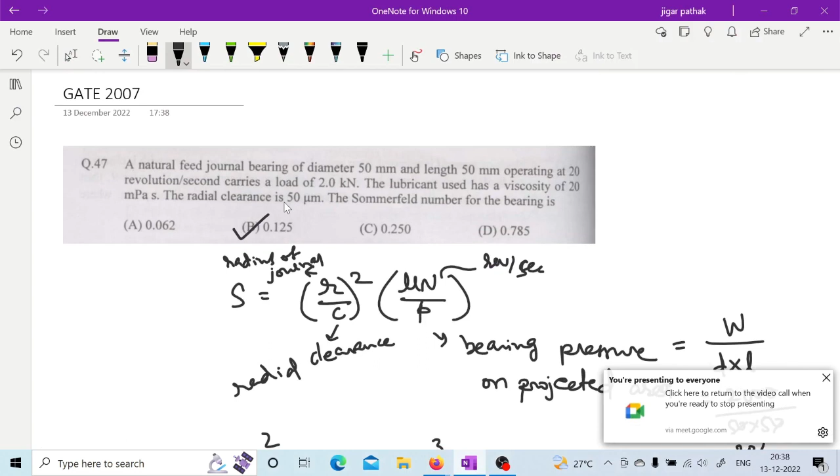Hello, is it clear? Anyone? Okay, so let us go to the next one. Yes sir.

That is, a journal bearing has shaft diameter of 40 mm and length of 40 mm. The shaft is rotating at 20 radian per second and viscosity of the lubricant is 20 millipascal second. Clearance is this. The loss of torque due to the viscosity of the lubricant is. So can you try this one?

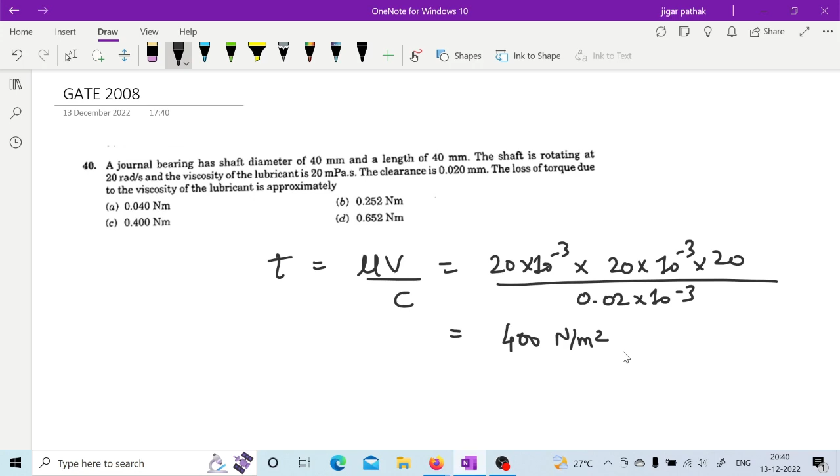Right? Are you getting this? Stress, shear stress. Anyone? Hello? Yes, sir. Okay.

So once you get this stress, then you can calculate the force, that is stress into area. Area is, what will be the area over which it is acting? That is the projected area, pi dl. Area is pi dl. 400 into pi into diameter, again 40 into 10 to the minus 3, into length, again 40 into 10 to the minus 3. So that will be the force. So what is force?

Can anyone? If we can cancel, 0.64, 2 point something. Okay, so 4 into 4 into 4, that is 64, right? So 640 into 10 raised to minus 3 is 0.64 into pi, that will be force.

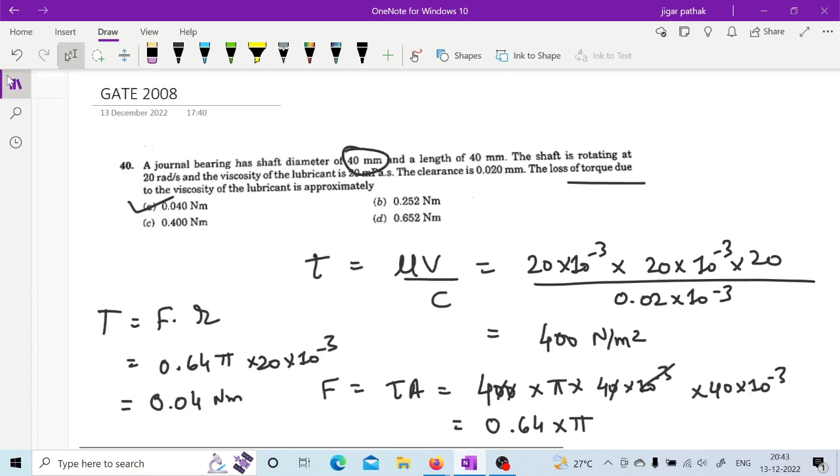Okay, then next is this one. A lightly loaded full journal bearing has journal diameter this, then bush bore of 50.05 and bush length this, rotational speed of 1200 rpm and average viscosity of the liquid lubricant is 0.03 Pascal second. The power loss, I guess it is similar. Can you try this? You will be able to calculate this by yourself, I guess. Yes or no?

Here U is pi dn by 60, I am telling you. The same way you can calculate, which we have done previously, right? And clearance is this 50.05 minus this 50 divided by 2, because we are going for radial clearance. So then again you can follow the same thing. First you can calculate your shear stress.

Tau is equal to mu du by dy. You have mu as 0.03 Pascal second. This u and y you have already calculated, from these two equations, right? You can calculate this, and then you can have this tau. Then again, that force you can calculate with this tau into pi dl, projected area. Then once you have force, then again torque will be this force into D by 2.

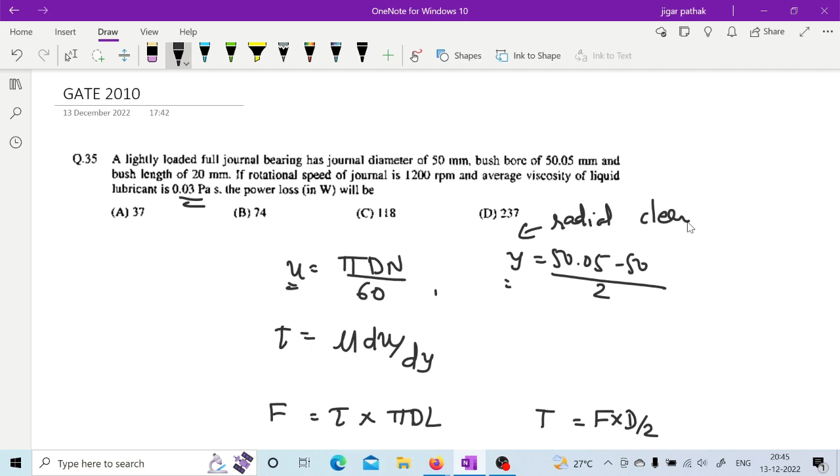Right, so this way you can again calculate the torque. But here they have asked the power loss in watt. So actually whatever we calculated in the previous question, that is in Newton meter. So there is a relation: power is 2 pi nt by 60. So in the previous question it was the torque, I guess, and then they asked for the loss of torque, that's why we have Newton meter. Now they are asking for power, so we need to go for power equals 2 pi nt by 60. I guess you will be able to do it, you can quickly calculate and tell me.

Is it A? Yeah, it is A only. I guess you will be able to do this if you follow this. Should I go to the next question then? Yes or no? Okay, so let us go to the next one.

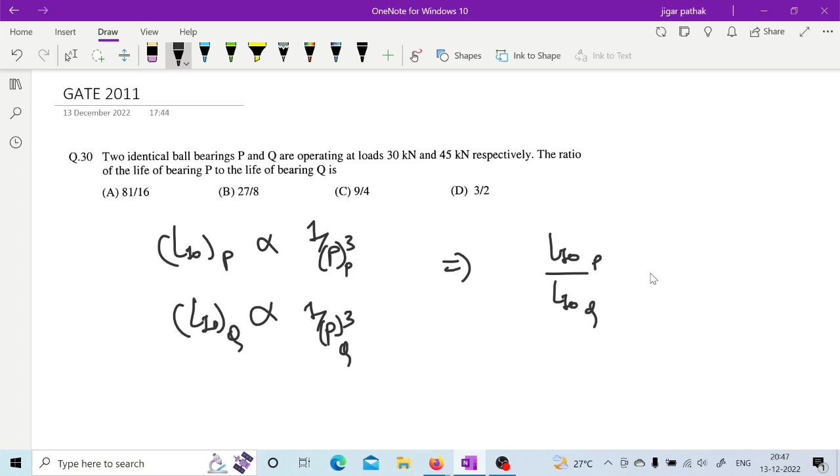It is also simple. Two identical ball bearings P and Q are operating at loads 30 kN and 45 kN. The ratio of the life of bearing P to the life of bearing Q is. So I guess this again you can go for this. I'll tell life of P is proportional to 1 upon force in P cube. Then I'll tell life of Q is again proportional to 1 upon force in Q cube. So I'll tell this ratio of P and Q will be equal to force in Q divided by force in P, raised to the power N.

Because it is ball bearing, this N is 3. Here P and Q are 45 by 30, I guess. So tell me. B? Answer B, yeah. Because 45 by 30 is 3 by 2 raised to 3, so that is cube of 3 divided by cube of 2, so it is 27 by 8.

Then next is this one. A hydrodynamic journal bearing is subjected to 2000 Newton load at a rotational speed of 2000 rpm. Both bearing bore diameter and length are 40 mm, if radial clearance is 20 micron and bearing is lubricated with an oil having viscosity 0.03 pascal second. Sommerfeld number, you can calculate this, right?

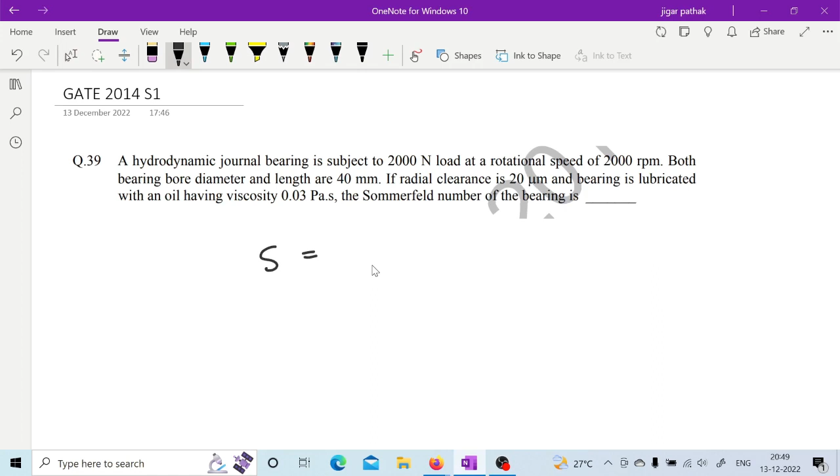Because now you know what is the Sommerfeld number. What is Sommerfeld number? You have calculated, right? Can anyone tell? R by C bracket square into mu ns by P.

Right? So what is R here? 20 mm. Diameter and length are given as 40 mm, so radius is 20 mm. Then clearance is 20 micron, so 20 into 10 raised to minus 3 mm. Then mu is 0.03. Then here RPM must be in seconds, so it is 2000 divided by 60 because it is given in revolution per minute. And this bearing pressure, so actually this you need to calculate, I guess.

Answer is 0.8, yes, correct. So you need to calculate this P, bearing pressure, that is W by A. This bearing pressure P is W by A, where W is given as 2000 Newton. Area is diameter into length, that is 40 into 40. So it will be this 40 into 40, I guess we need to consider it as into 10 raised to minus 3, so 10 raised to minus 6 if we go for both.

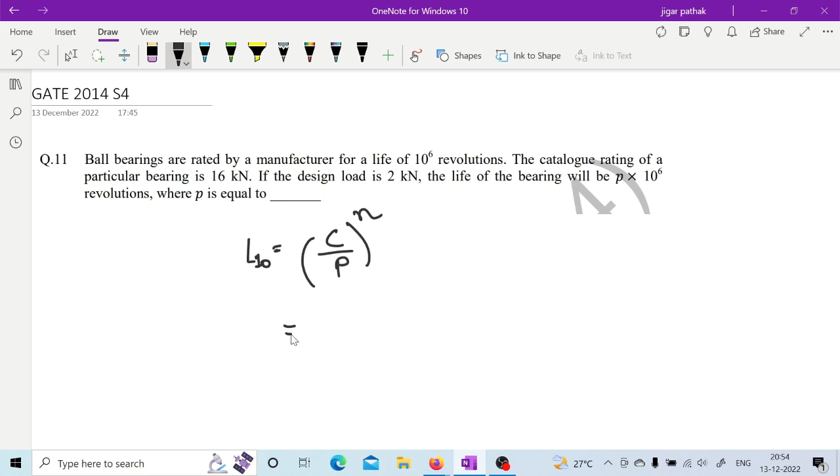So that, sir, answer is 512. Anyone else? 512. Yeah, it will be 512, because C is 16 kilonewton, P is 2 kilonewton. So it is 16 by 2 raised to 3. It is simple, straightforward, because it is ball bearing, so N will be 3. So that is why it is 512, into 10 raised to 6, it is already mentioned. So that is why it is 512. Correct?

Okay, so the next is for ball bearings, the fatigue life L measured in number of revolution and the radial load F are related by FL raised to 1 by 3 is equal to K, where K is a constant. Now it withstand the radial load of 2 kilonewton for a life of 540 million revolutions. Now the load in kilonewton for a life of 1 million revolutions. Can you try this one?

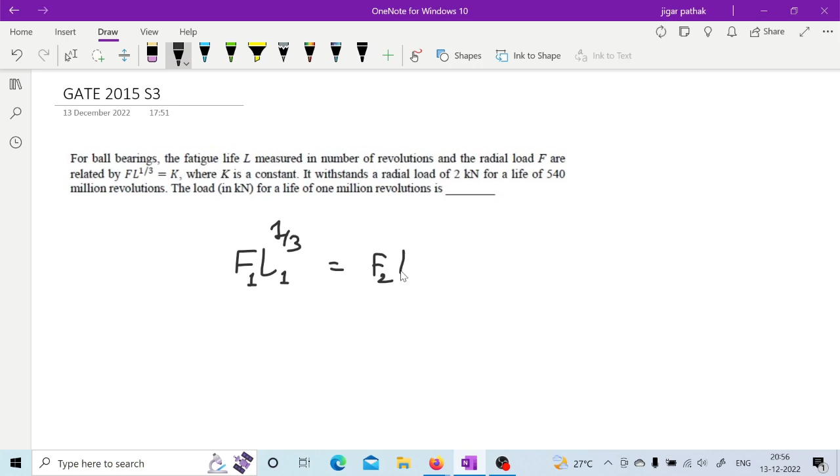So it is also straightforward, right? 13.2. I don't know, anyone else, because FL raised to 1 by 3 is constant. So F1 L1 raised to 1 by 3 is equal to F2 L2 raised to 1 by 3. This F1 is given as 2 kilonewton, and L1 is given as 540 million revolution, equal to, you are asked for 1 million revolution. So for 1 million revolution, what will be the F2? So what is that?

Sir, regarding the power 1 by 3, should we take it as 1 by 3 itself, or can I take it as 0.3? Because if I take it as 0.3, I will get around 13 answer, and if I take it as 1 by 3 whole, it will come around 16. Actually 1 by 3 is better, because 1 by 3 is 0.33333. So 1 by 3 is not 0.3 actually. Are you getting? Yes, sir. So it is better to go with 1 by 3. So it will come around some 16.28 kilonewton or something like that.

Yes, sir. Okay, so let us go to the next one. Which of the bearing should not be subjected to a thrust load? Can anyone try this one? C, Chennai. Yeah, cylindrical roller bearing, correct. This cylindrical straight roller bearing cannot take thrust load. Otherwise, this deep groove, or this angular contact, or this tapered roller can take the thrust load.

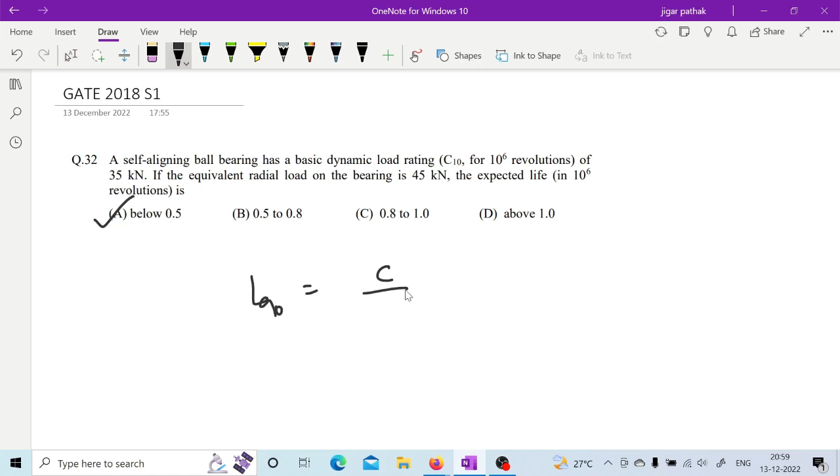So C is given as 35, and equivalent radial load P is given as 45. A. Yeah, correct. So anyone else? Sir, A. Yeah, it is below 0.5, because this L90 or L10 will be C by P raised to 3, again, because it is ball bearing. So C is 35, P is 45, so this will come around 0.4705. Okay, correct. Yes, sir. So this is how you can come up with your answer as A only, it is below 0.5. Okay, so today we will keep up to here.